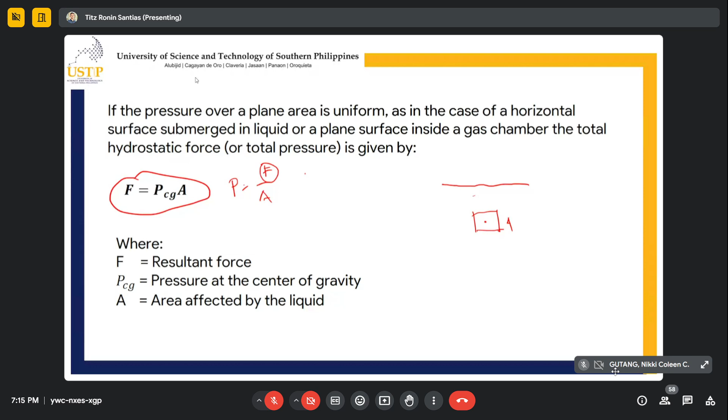Location of the force from the center of gravity - that is what we call eccentricity.

An example of this - it's a bit difficult, but let's say it's inclined. Let's place here a rectangular prism. So of course, where is the center of gravity? It's in the middle. So the center of gravity is there in the middle, but the center of pressure, or where the force acts, class, is not at the center of gravity. It's at what we call the center of pressure, which is always, I repeat, always below the center of gravity. So the center of pressure is there, and the force acts there instead.

That's called center of pressure. And the distance between center of gravity and center of pressure is what we call the eccentricity. So that is E. E is equals to I, or inertia over...

area y bar. And also your y bar is equals to h bar over sine theta. So what this means, I of course is the moment of inertia, A is area, y bar is the location of center of gravity parallel to the plane.

What does this mean? So example, imagine your object is lying flat. Its y bar is this. Since it's lying flat, the distance going to the eccentricity is just that much. Eccentricity is measured from the top which is inclined. But the h bar is the location of the center of gravity respecting the true vertical.

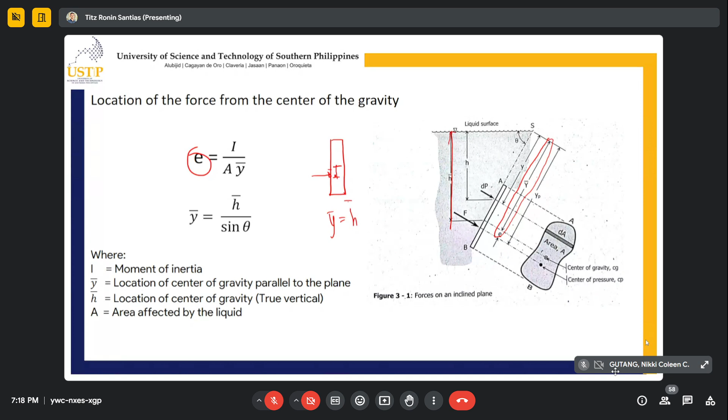Okay, let's continue. Properties of common plane sections. Kindly take a screenshot or picture. The important thing here is to remember. For triangle, the moment of inertia respect to g of x is equals to bh cubed over 36 for triangle, while rectangle is bd cubed over 12.

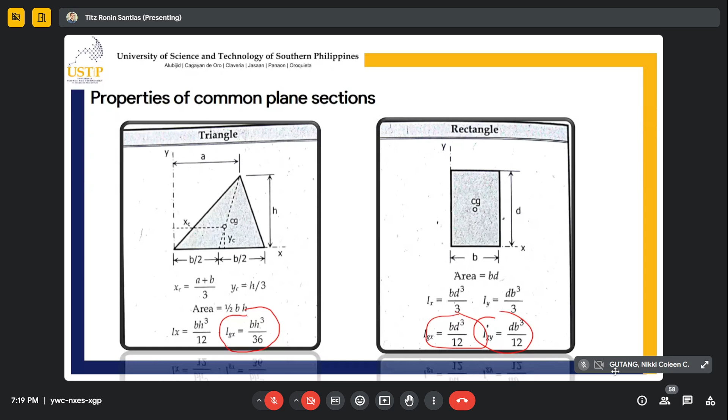Let's remember, rectangle is over 12, triangle is over 36, and circle is over 64. And the others, it's important to memorize them too, but the most common sections are triangle, rectangle, and circle. There's also quarter circle and other shapes. Kindly check the book, and also research the internet for different shortcut formulas for moment of inertia of different shapes, but the ones we always use are triangle, rectangle, and circle, sometimes quarter circle. So let's try solving now.

So, I guess no questions so far. Let's continue.

A vertical rectangular plane of height 5 meters and base 3 meters is submerged in a liquid with its top edge at the water surface. Okay, so the top edge is at the water surface. Determine the total force acting on one side and its location from the liquid surface. So let's draw this, the top edge is at the water here, and we have a rectangular object here. We have height of 5 meters, so this is 5 meters, and base of 3 meters. So height is equals to 5 meters, or depth, base is equals to 3 meters.

So let's try solving the first question. Determine the total force acting on one side. F is equals to PCG times area. So, pressure at the center of gravity. So where is the center of the rectangle? It's here at the middle, that is half of 5.

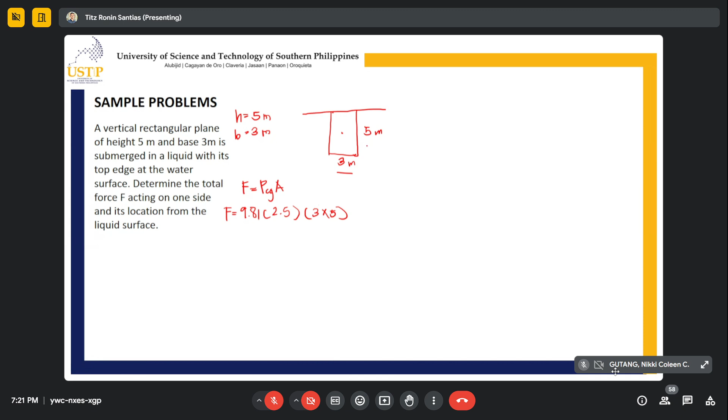So, 9.81 multiplied by 2.5, multiplied by the area, which is 3 times 5. We need to calculate this. Okay, are we the same? 367.875. Thank you for participating.

I really appreciate it since it's online and I can't see who's listening and who isn't. So that just depends on you.

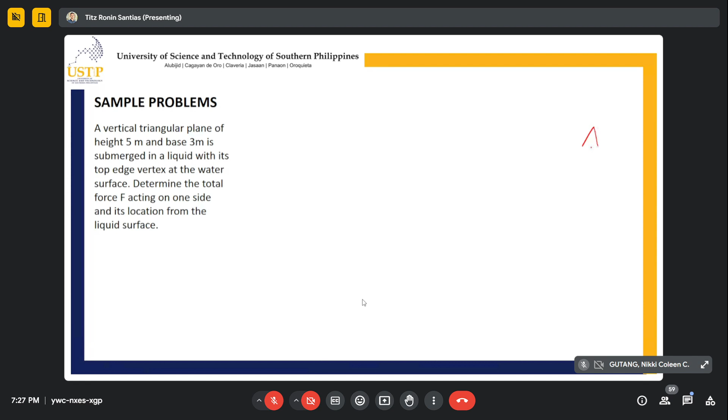Let's continue. A vertical triangular plane of height 5 meters and base 3 meters is submerged in a liquid with its top edge vertex at the water surface. So that's our vertex in a triangle. I hope you know this is the vertex, that pointed tip.

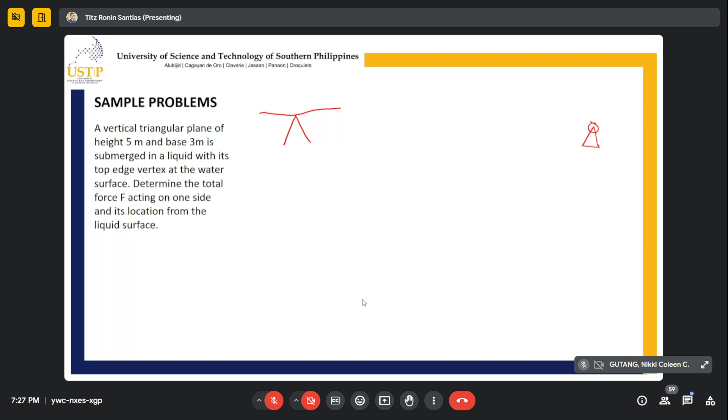So force is equals to P at center of gravity times area. Force is equals to pressure at the center of gravity. So the center of gravity of the triangle shape is not directly at the middle, or 5 divided by 2. No, among the three shapes we solve - circular, rectangular, and triangular - triangular is different.

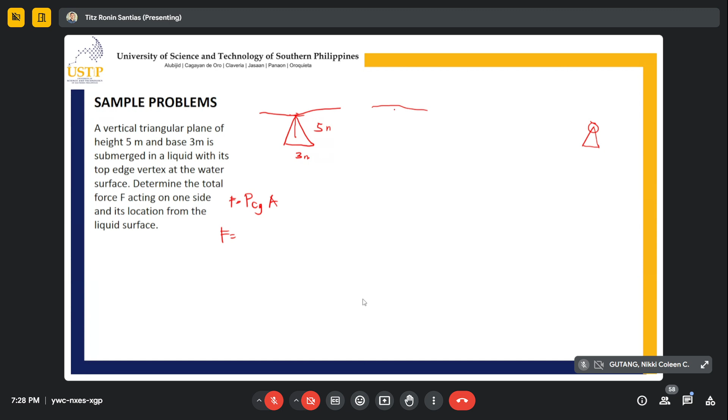So when it's like this, the center of gravity is at 2/3. So 9.81 multiplied by 2/3 of 5, multiplied by area, which is 1/2 base times height, so 5 times 3. And that would give you a force equal to 245.25 kilonewtons.

Thank you. Now, let's solve the eccentricity. Eccentricity is equals to moment of inertia over area y bar.

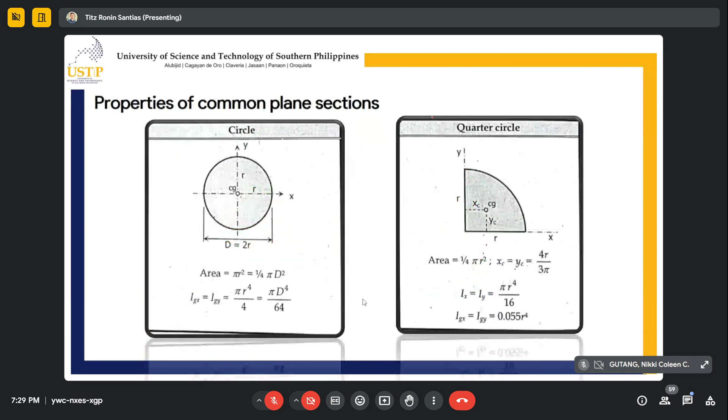This is 12. So this is 3, 5 cube over 36, over area, which is 1/2, 5 times 3, over y bar, which is 2/3 of 5. E is equals to...

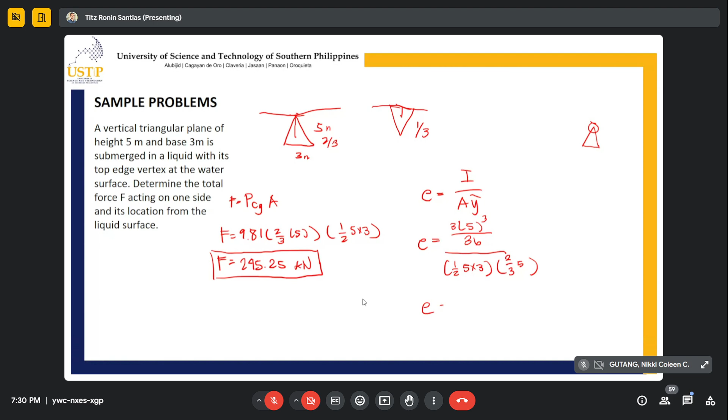0.42. Wow, you really calculated that? 0.42 meters. So of course, from the surface, what we get is h to the surface is 2/3 of 5 plus 0.42, and that should give us HS is equals to 3.75. Thank you, Franz. Thank you, Harley.

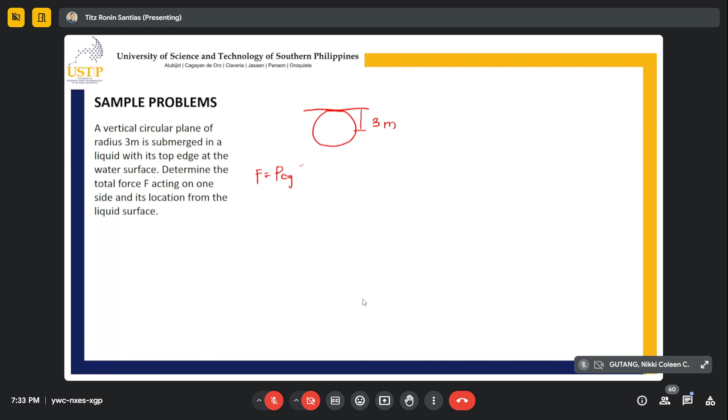F is equals to PCG area. F is equals to 9.81 multiplied by 3 meters, then pi over 4, 6 squared. You can also use pi r squared or pi over 4 d squared. So either of the two you can use pi r squared or pi over 4 d squared. If you use d, you'll use the whole diameter. If you use r, that's the radius.

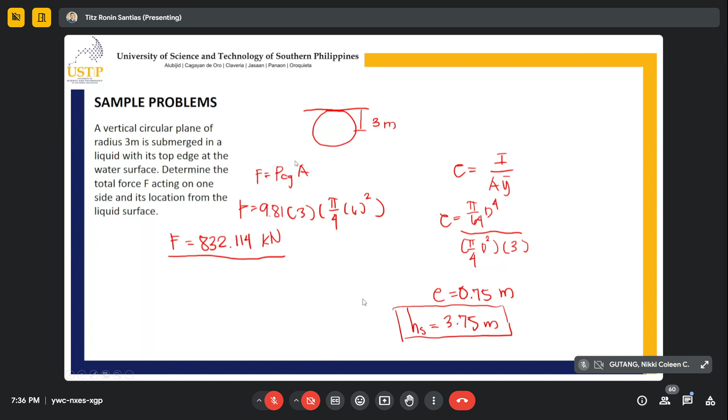Okay, let's continue. This one is easy. A vertical rectangular gate, 1.5 meter wide, 3 meter high, is submerged in water with its top edge 2 meters below the water surface. Determine the total force acting on one side and its location from the bottom.

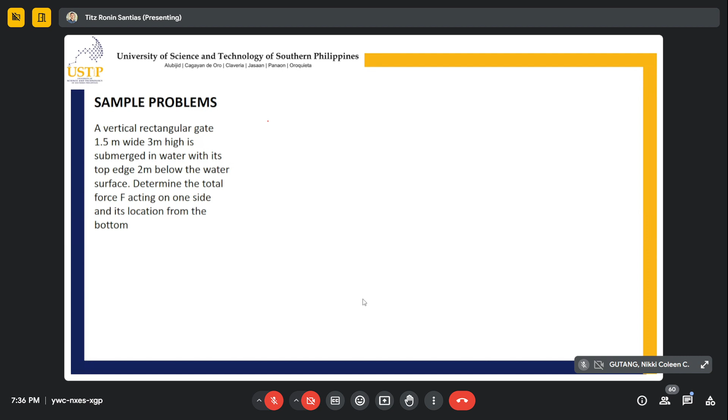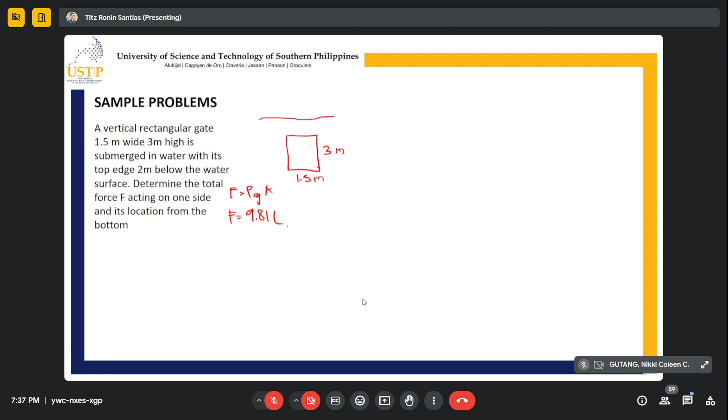This is 3 meters, this is 1.5. F equals 9.81, shortcut na ko. F is equals to PCG area, 9.81 times center of gravity. This is 2 meters plus 1.5 - why 1.5? Half of 3. So 2 plus 1.5, that is 3.5 multiplied by the area.

The area of the object is 3 times 1.5. So that will give you 154.51 kilonewtons.

While eccentricity is of course I over y bar - area y bar. I is rectangular, so BD cube over 12, over area, which is 3 times 1.5. Y bar is 3.5.

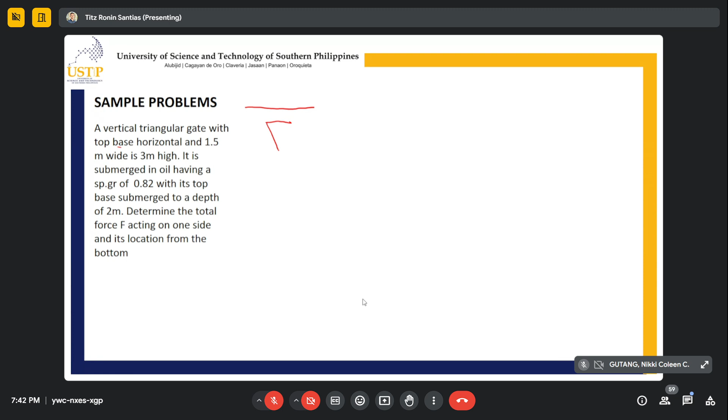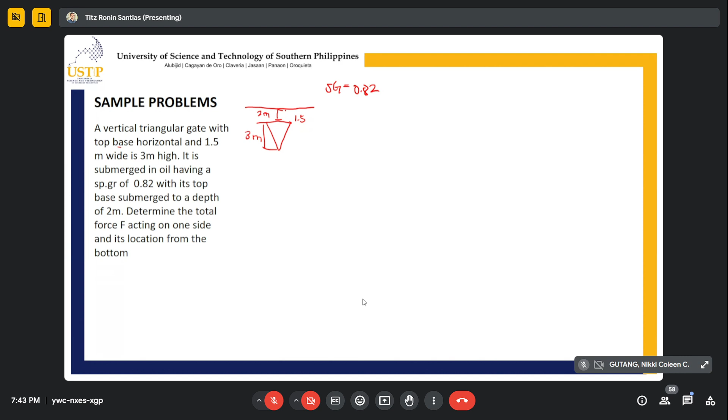A vertical triangular gate. The vertical triangular gate with top base horizontal and 1.5 meter wide and 3 meters high is submerged in oil, having a specific gravity of 0.82 with its top base submerged to a depth of 2 meters. Determine the total force acting on one side and its location from the bottom. Let's try to first draw this so you can visualize it. Vertical triangular gate with top base horizontal, so this means top base horizontal. This is 1.5 meters wide and 3 meters high. It is submerged in oil having a specific gravity of 0.82, with its top base submerged to a depth of 2 meters. So this is submerged 2 meters. Determine the total force acting on one side and its location from the bottom.

So F is equal to gamma times center of gravity times area. Center of gravity is around here. So F is equal to 9.81 multiplied by the specific gravity of the liquid - earlier I didn't multiply because it was just water, now it's oil so it's different. So 9.81 multiplied by center of gravity location, that's 2 meters plus 1/3 of 3 meters, or that is 1. Area is equal to 1/2 times 1.5 times 3 meters. That would give you force is equal to 54.3 kilonewtons.

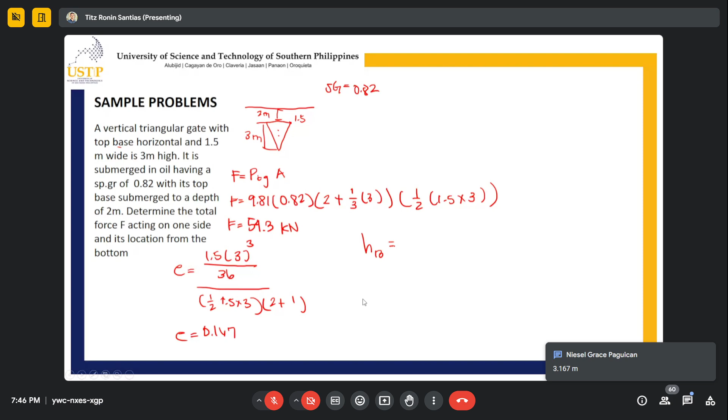Now what's being asked is location from the bottom. So HB is equal to 2/3 of 3 minus 0.167. Why 2/3? The distance between the bottom and the center of gravity, that is 2/3. If it's at the top, from the base it's 1/3; from the vertex it's 2/3. Since we're going from the bottom, that is 2/3 of 3, which gives you 6 divided by 3, that is 2. 2 minus 0.167 is 1.83 meters.

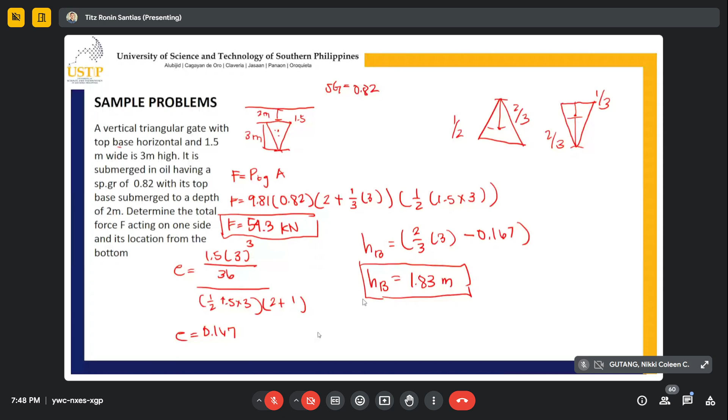Okay, let's continue. A vertical rectangular plate is submerged half in oil of specific gravity 0.8 and half in water, such that its top edge is flush with the oil surface. What is the ratio of the force exerted by the water acting on the lower half to that by oil acting on the upper half?

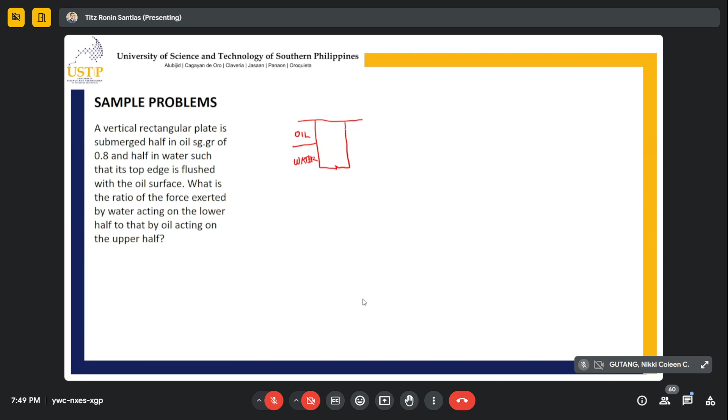So para mas dali, we can assume dimensions, kay mas theory ang gipakita diri. So ang rectangular plate submerged half in oil. Butang ta diri: this is oil, this is water, such that its top edge is flush with the oil surface. Let's assume para dali ra masolve: this is 3 meters, this is 2 meters, this is 4 meters. So how do you do this?

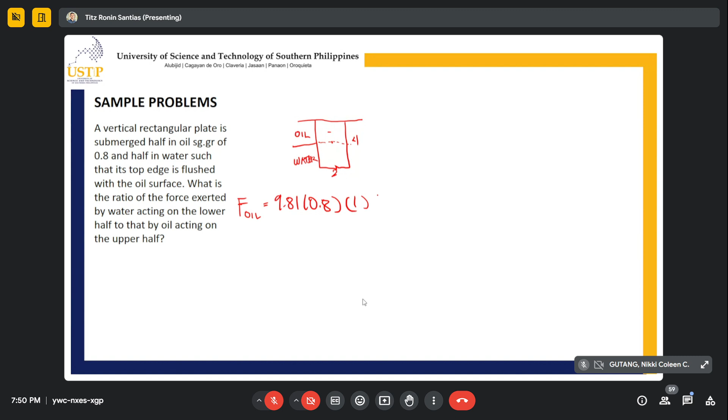So in solving this, let's get the force sa oil side. Force oil equals 9.81 multiplied by 0.8 multiplied by the center of gravity. If oil mo i-consider, ang center of gravity sa oil wala sa tunga sa buong plate, naa lang sa tunga sa dapit nga oil. So that is 4 divided by 2 para maabot ka sa tunga, i-divide pa nato ug 2 para maabot sa tunga sa oil, which is 1 meter. So 1 meter multiplied by the area affected by the oil only, which is 2 multiplied by 2. So the force in oil is equals to how much?

31.39 kilonewton. Now let's try getting the force water, which is 9.81 multiplied by the specific gravity, which is also 1.

That's already set. Multiplied by the center of gravity, kung asa man siya affected sa water. This is 2 meters, this is 2 meters diri. So asa man ang tunga sa water? Naa diri, so that is 2 plus tunga, which is 3. Affected ra pud din sa water, which is 2 times 2. Force water is equals to pila?

117.72 kilonewton. Now, ratio ang gipangita. So just divide the force of water over force of oil: 117.72 over 31.39, and that would give you 3.75. Just check the ratio, if 3.75 ba.

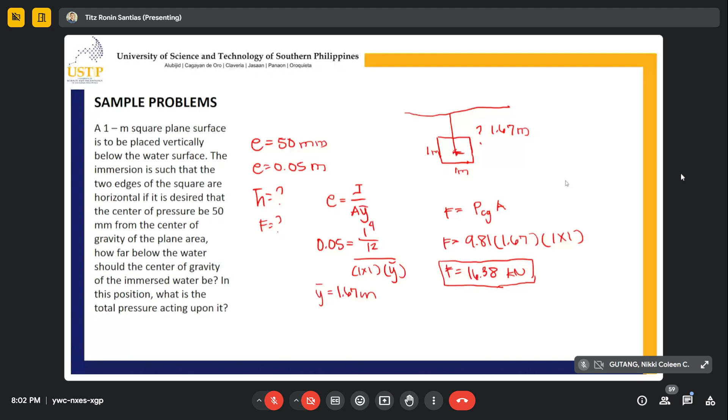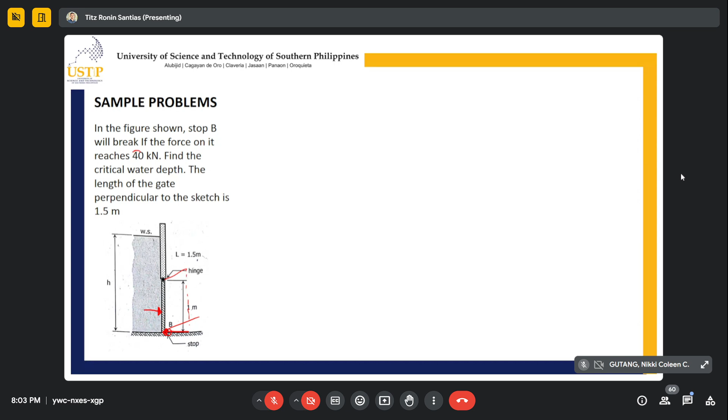So if we take the moment, summation of moment along the hinge equals 0, whether clockwise or counterclockwise positive, it's the same result. Some professors teach counterclockwise positive, others teach clockwise positive, but it doesn't matter, the result is the same. So let's use counterclockwise positive.

Let's label this as force bottom, then force water. So force water equals force bottom: force water is 40 multiplied by the moment arm, which is 1. Wait, I haven't multiplied that yet. Let me redo this properly so we don't get confused about the moment.

So force water is counterclockwise, so that is positive. If force water's moment arm going up is the distance of eccentricity plus half of it, we can just call it z. So this equals FW multiplied by z minus, it's minus because this is clockwise, FB multiplied by 1, its moment arm. I won't explain moment further since you're already third year.

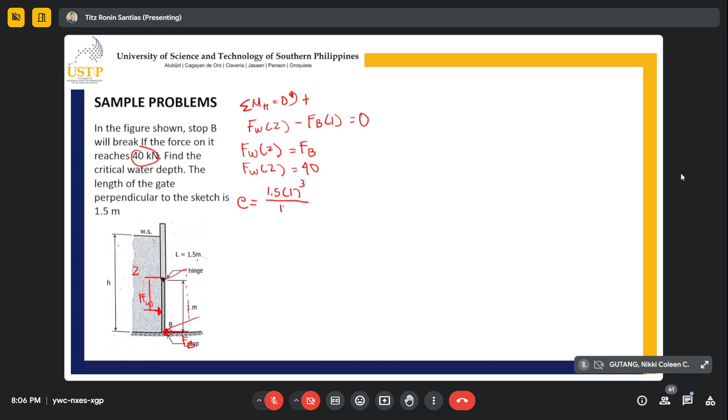Let's try to do this. So 1.5 by 1 cube over 12, over the area, which is 1.5 multiplied by 1, times y bar, which is unknown. In terms of y bar: 1.5 times 1 cube over 12, over 1.5 times 1. So this is 1 over 12 y bar.

Now after you get that, class, you'll know that z, the distance between your hinge and your force, equals half of 1, so that is 0.5 plus the eccentricity, which is 1 over 12 h bar. Now that you know z, you can solve for it.

You can get it based on what you input into the formula. But first we still need the force of the water. So force of water is 9.81 in terms of h, multiplied by 1, multiplied by the specific gravity of water, multiplied by h bar or the center of gravity distance, which is unknown, multiplied by 1.5 times 1. That would give us 14.715 h bar. Now h bar is treated as our unknown.

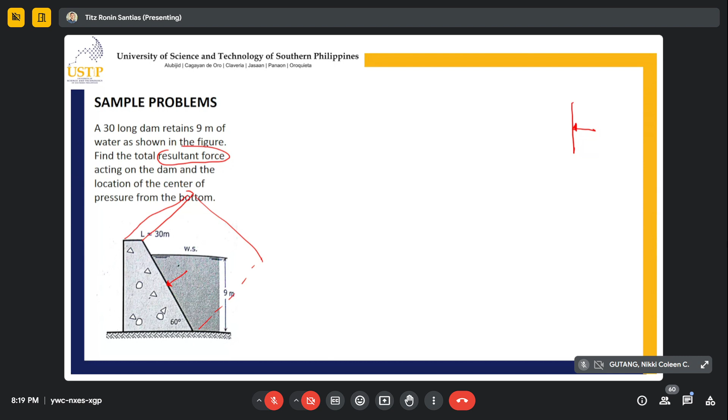For this problem, the first thing to find is the force, using P, Cg, area. Let's try to solve. P is 9.81 multiplied by... we have 9 meters here.

What's half of 9? 4.5. Now area is 9 multiplied by 30, and that is wrong.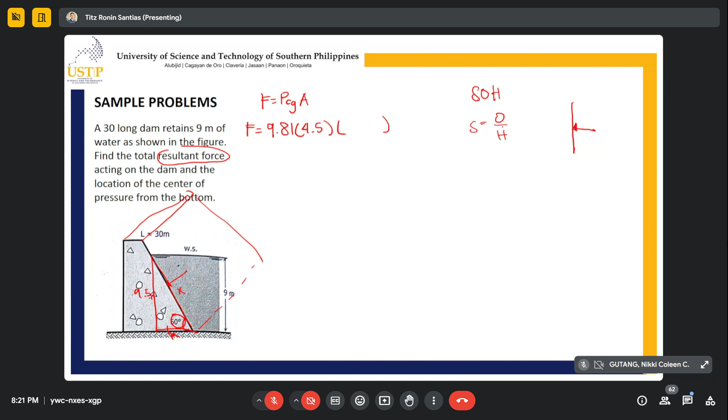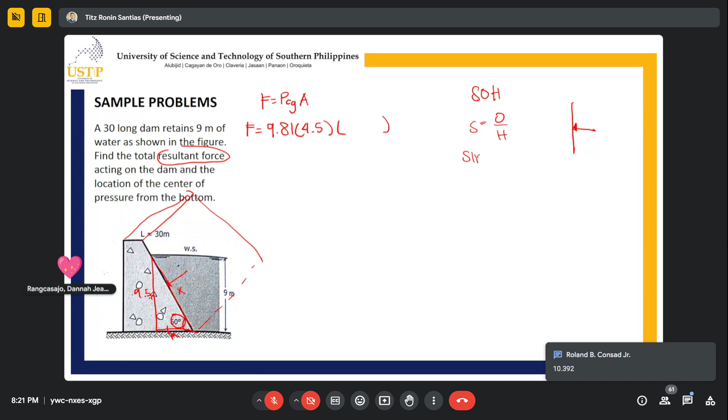So sine 60 equals opposite, which is 9.5, over hypotenuse. Wait, is it 9.5 or 9 meters? We're getting confused. It's 9 meters over sine 60. Let's solve — don't square it, just solve it directly. The answer is 10.392.

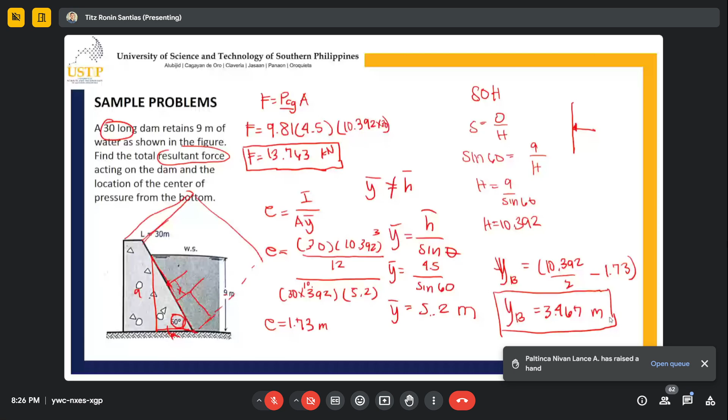Sige, ni ba? Ay sir, akong question sir kay nganong sa force sir kay gigamit kay 4.5 sir, di ba triangular man na siya sir, dili kuan gamiton na sir 2/3? Dili ni siya triangular, kay no?

Triangular lang ang iyahang ora siya, let me explain. Wa na tay space pero I'll try to erase this. Bali, mura siya triangular, no? Pero, di ba paana man na dagto? Paana na dagto, so paana.

So kibali, rectangular, ragyapon siya. No? Paana ang iyang forma? Kibali, kabag-on bitaw sa dam. Gets rin mo nga murag, ang bali ang murag area of contact niya sir kay kuan man sa sir no rectangle, ay murag dili siya rectangle. Yeah, dili basa, siya basa, triangle. Okay, diba sir. Imagine na nga, murag ang dam 30 meters siya padulong dagto sa likod, no? Padulong dagto sa likod so may imagine nimo nga rectangular gaak ang force. Dili siya triangular.

Sabtan na sir. Thank you, sir. Sige. Any other questions?

Ay sir, nganong gigi-divide ang divide to ang concert 10.39 to? Kay location from the bottom man daw. So kibali kabalo naman ta nga kaning gaslant diri no. Sorry, daga na kay kuris-kuris. Kaning gaslant diri, this is kaning distance diri sa taas padulong sa ubos, this is 10.392. Now, ang gapangitaon man daw nato gikan sa, di ba diri ang center of gravity, diri ang center of pressure. Matanta diri gaak ang force no. So ang giyang gipangita is location of the center of pressure from the bottom. So kibali gikan diri padulong diri sa ubos. So 10.392 divided by 2, or imong gihaf, abot na ka sa tunga.

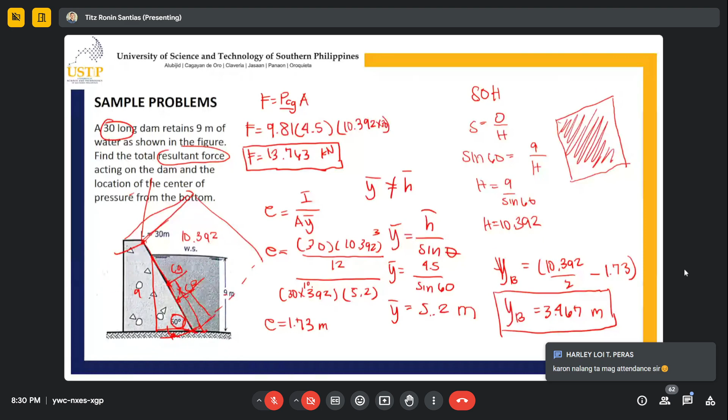So the isosceles triangle gate, kani isosceles. So triangle na gid ni dayon siya, no? Triangle na daw dayon yang area of contact ani, no? Bisag padagto na siya pero yang gi-show diri nga yang porma ana sa ato ang 3D is naka-triangle. So triangle na compared sa ganina no nga i-explain niya nga pa 30 dagto so rectangular ang kibali ang force. Pero kani is triangular na daw gyud ang object. So the isosceles triangle gate, kibali na siya nga triangle shown in the figure is hinged at A and weighs 1,500 newtons. So what is the total hydrostatic force acting on one side of the gate in kilonewton?

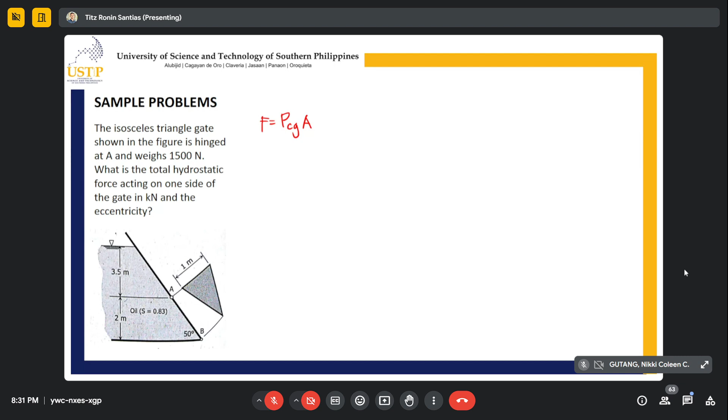So let's try to solve this. F is equals to P, CG, area. So let's try to get H bar first, no? H bar, para isa-isaw na to kuha. H bar is the distance sa surface padulong sa center, respecting true vertical, no, always true vertical. So that is 3.5 plus half sa 2 meters, so that is 1 meter. So H bar, mo ang difference ni Y bar ug ni H bar ha. Si H bar always gina siya sa true vertical. So 3.5 plus 1, that is 4.5 meters.

Now, ito ang area, tagsa-tagsaw na to. Area is 1/2 times 1 multiplied by, wala data kabalo, 1 multiplied by kung pila man ni siya. Dere again balik na pud tagso ka towa. Okay, 2 meters dire, so same ra ganina no, sine ra gyapon natong gamiton. So in order to get the hypotenuse, sine 50 is equals to opposite over hypotenuse, or hypotenuse is equals to opposite, which is 2 over sine 50. Pila man na? 2 over sine 50, 2.61. Okay, H is equals to 2.61. So 1 multiplied by 2.61, mo nang area, and that would give us, pila pala ko calculate.